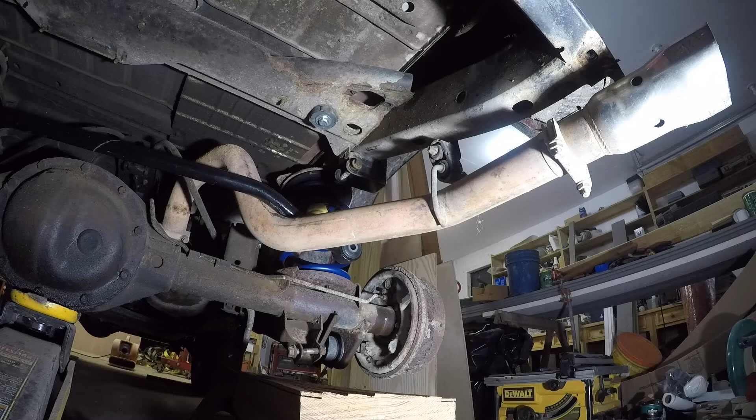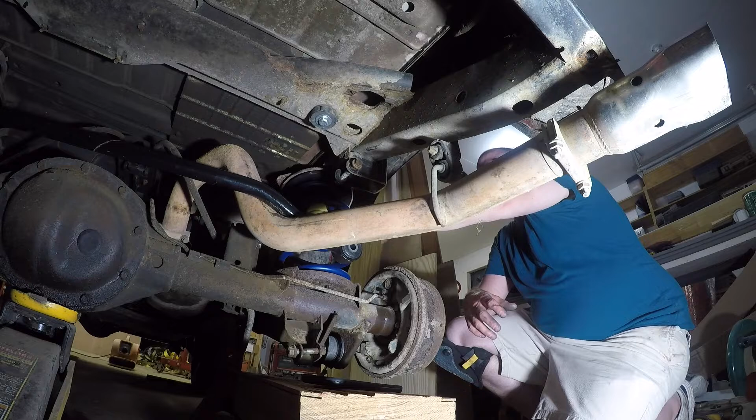I've been quite lucky. I've pretty much been using all of the original bolts, except for the two in the bump stop. Those were horrible, in real bad shape.

I'm going to just reuse this bolt. That's probably not a safe place. The bolt's had a little bit of rust, but it's really nothing. Although I believe I bought a new one. I am going to go ahead and replace this nut.

So I'm gonna lather this baby up with a whole lot of anti-seize. How much I love this stuff. That's a joke. Hammer most likely. Son of a bee, son of a bee.

I'm gonna put this on. I guess because I'm kind of nervous about my jack. Yeah, I know I got blocks everywhere.

That's not right. Come on, son of a gun. Alright, I can't put it in there too much. Let's see if I can pry it back down. That's too much.

I feel like it's slightly off. I don't know. I'm gonna... Jesus, I think the axle needs to come this way.

Just gotta torque everything here. So yeah, I'm excited, I can't wait to try this thing out. I just hope it rides better. Everything I've read on all the forums about these springs, people speak so highly of them. So I hope they do okay.

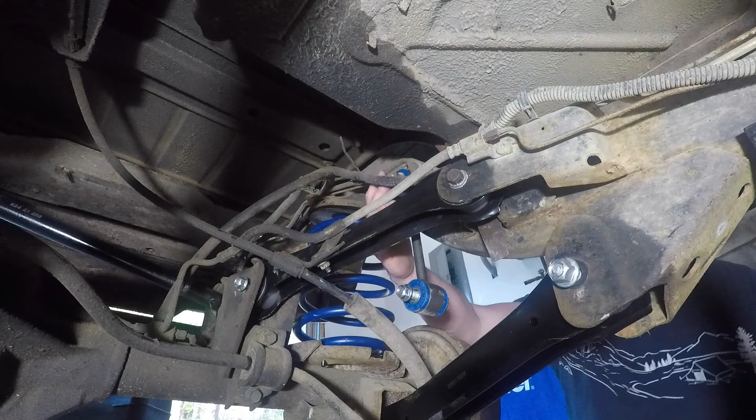Okay, this is, I think, called a sway bar link that I'm installing. You all can probably see it a lot better than I can. I was debating whether to reuse this little deal or putting the nut on. Yeah, this is kind of a pain in the butt.

Can't see anything, where is it? God, that sucker's so in there. I think I'm just going to reuse this sucker. I mean, you really shouldn't, we should use a new nut. But you know what, screw it, I'm going to reuse it. It's so hard to get the damn thing in there.

Yeah, I was debating whether I'd use the nut or not, but you know what, screw it, I'm just going to reuse this stupid thing. It makes it way easier. And I'll just reuse the nut here.

I'm going to put anti-seize on everything. If you have a car lift, this would be a lot easier, but I'm trying to save money. I'm not going to go dish out a whole bunch of money to someone to do this when I can do it at home. Save a few bucks, or I should say a lot of bucks.

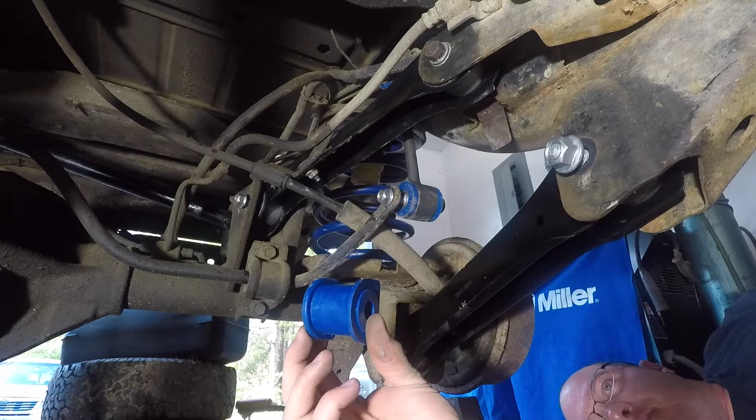And I'm also going to go ahead, if you can see it, these little bushings inside here on the axle, that's what these are. I was waiting for Rock Auto to send them, because they didn't ship for some reason, they missed it. So I'm going to replace those on the axle, and pretty much everything will be all good and new. So I'll come back here in a second.

I believe this is a 15 millimeter. I hope this thing's not under too much tension. I don't believe it is. Hopefully I can just kind of slide it out and replace this little sucker. I mean, it may not even need to be replaced, but I'm not second guessing any of it.

This thing rode horrible, it was really, really, really bad. Real sketchy, couldn't take it over, I don't know, about 25 miles an hour.

I won't bore you. What I'm doing on this side will be the same on the other side, so anything I do on one side will be exactly the same on the other. So just for video purposes, to make it a little bit more simple and straightforward.

Let's see here. Oh yeah, it's gonna be hard to get off. Come on, wiggle, wiggle. There we go, that's not too bad. That should pop off. Sweet.

Let's see which side should I put it. That was in the back. Maybe I'll go like that. See the sliced end, sliced end is on the back side. On the one from Moog, the sliced end is in the front. I guess it doesn't matter.

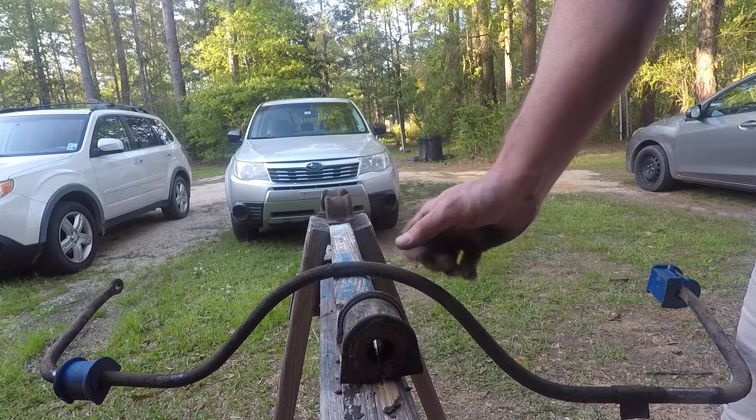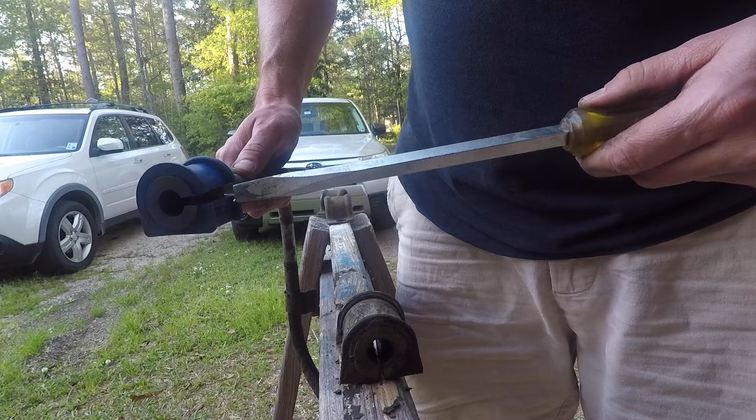Alright, so what I did is I just took the whole bar out. I couldn't really get them on it, you know. So what I did was turn it around here. I took the screwdriver - I'm not going to waste y'all's time 20 minutes fighting with this thing - and I stuck it in here and twisted it this way to open it up. And that's how I was able to shove it on there and get it started.

So I just kind of work it with my hand here. Oh shoot, come on Chris, don't screw this up.

Now y'all might want to check this out. This thing looks kind of worn. I mean, I'm going to throw it on there, I don't really care, but y'all might want to check yours out. Because if you're living up north - I'm in the south, I'm not really worried about rust here too much - but yeah, I can feel it. I know that's grease, it's grit, but it is actually slightly worn. Maybe that's just the paint. Yeah, maybe the paint, but if yours is heavily rusted, I would go ahead and replace it.

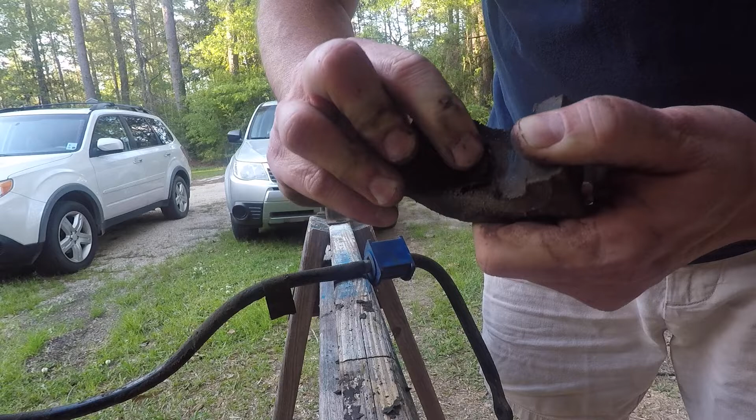And there we are, see if I can get a close-up. I don't know if you can see, the lighting's not too great. But this old one, I can peel it open pretty easily with my hands here. The light can catch it right if you can kind of see it. That is torn there, that is all screwed up. I can rip it open with my hand just about. So yeah, this thing is definitely worn out.

That off to the side. I don't remember how these went on, but I'll find out when I get under there. I know it went a certain way. Probably one's this way and the other one's the opposite. So I'll figure it out when I get under there. See you in a bit.

Alright, I slid it under here. Oops, yeah that's supposed to be somewhere there. And we'll put some anti-seize. I think it goes like that. Who knows, I could be redoing it in a bit. It looks like it, kinda sorta, the way it's shaped. Screw it. I'm used to doing things a few times, so you figure it out.

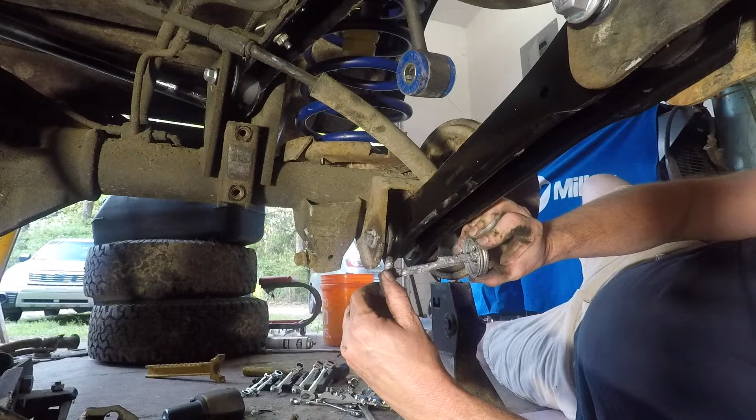So throw some anti-seize on this sucker. I have the torque specs in the manual, I'll shoot a video so you can see what they are. I think these are either 40 or 44 foot-pounds, but I hate to even say it, I don't want to be lying. I'll aim the camera at it and let you see what all the torque specs are. In some of the Jeep forums, I thought some of the numbers were kind of off that people were throwing out there. So I'll make sure I aim the camera there so you all get to see it, so you don't screw up for yourself.

I hate anti-seize with a passion. Yeah, someone out there is going to say oh no, you're not supposed to anti-seize that. I don't really care, that's what I'm doing. I want it to come off easier next time, which I hope will be a really long time before I take it off, but yeah, I still want it to be easier. And of course my socket's going to be on the other side. Hey, that'll kind of fit it. Why not, roll with it.

I'm not really torquing the - I mean, I'm going to torque them, I'm just wanting to snug them up for now. I'm not going to bore you, I'll pause it and jump to the other side and put the other one in. If there's something different I screw up, I'll turn the camera back on and admit my screw up.

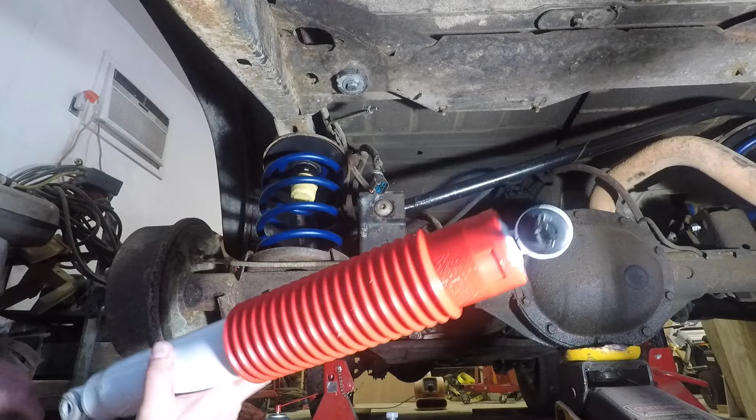Alright, so now it's about time to put the shocks on. Let me see here. Here it is, this is the Rancho RS5000. Guys on the internet said that these - some guys had told me they were really stiff. So, what can you do? Just try it out, right?

Okay, I believe what I did last time was I put these things in there and compressed them. I don't know which way I went with it, or maybe I used the jack. I don't know, yeah, we'll try it. Put my bolt through here.

I have another nut here, new nut. I'm a little bit concerned though about this piece of plastic here. I hope to God this thing - I don't know, I don't remember. My shocks didn't have all this plastic garbage.

All this plastic, I'm thinking the fuel tank might hit it, but I don't know for sure. Oh yeah, this ain't gonna work, I'm gonna have to put it in from the top. I don't remember how I did it. Maybe I used the jack to compress the bottom, that may have been what I did. I don't really remember for sure.

Anyway, some guys said that was really good, that they liked it. But these things, they're pretty good. I don't know if y'all can see this or not.

Alright, we're going to try this again. Dang it, love the cooler weather - everything I touch shocks the hell out of me. Okay, we got one here. Yeah, I just don't know if all this plastic garbage is going to clear the fuel tank. It will be interesting if it does, or it does not.

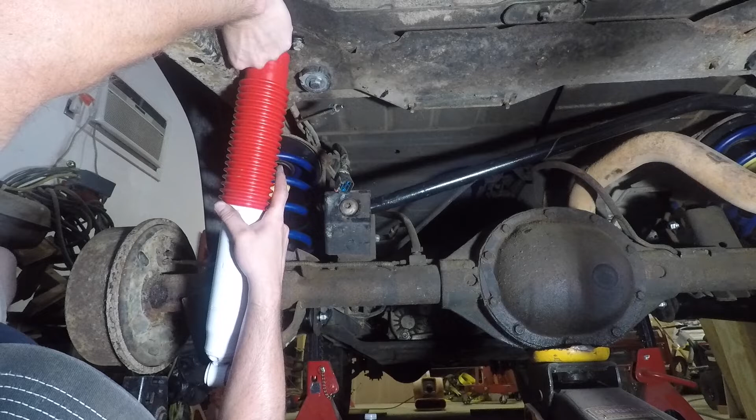Boy, that's tight. I think I can get a socket in there. Boy, it's going to be close. I may have to try and peel it up. Oh, Jesus.

I swear I feel like saying '1 hour later I found what I'm looking for.' Oh, man, that sucker's tight in there.

I think I have a short. I'm going to have to find a short. It ain't really going to fit very well.

Okie dokie, yeah, I can do it a little bit. I'm not a total weakling. Alright, come on, get back in the hole so I can catch it. Come on, get on down in there. There we go, let's see if this will fit it.

I don't know if this is it or not. Yeah, that feels like it. Sweet, alright, so one on.

I hate to lie, I think it's 23 on the top for those - those aren't much, and the bottom is a higher torque. Now, I mean it's not on the center chunk, it's just kind of there as an extra support. Now I can go around and torque everything.

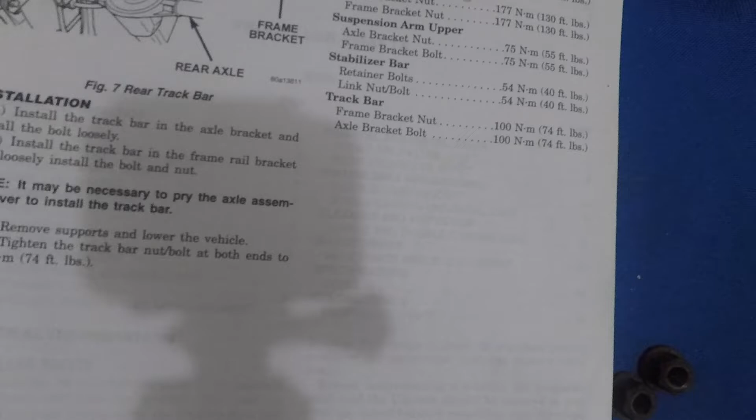No room in here, let's see here. These are all the torque specs, for such a tiny camera, and I can't even see. I'm gonna have to use my phone.

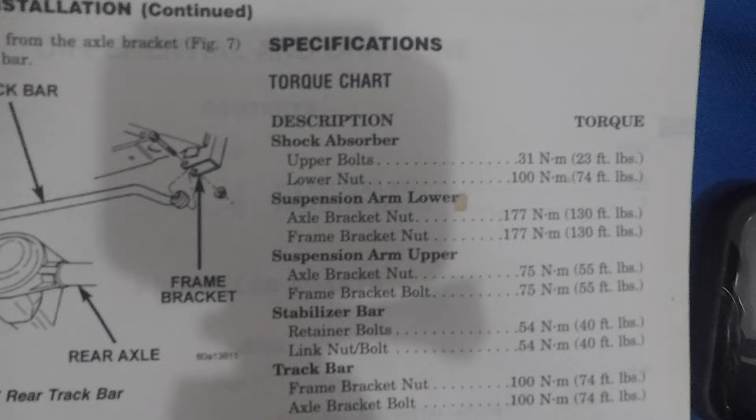See, these are all the torque specs, just for the rear. When I get to the front, I'll do it as a separate video so you all can see.

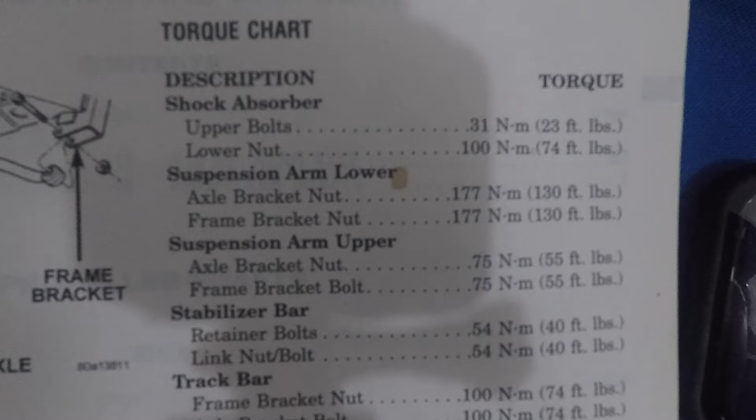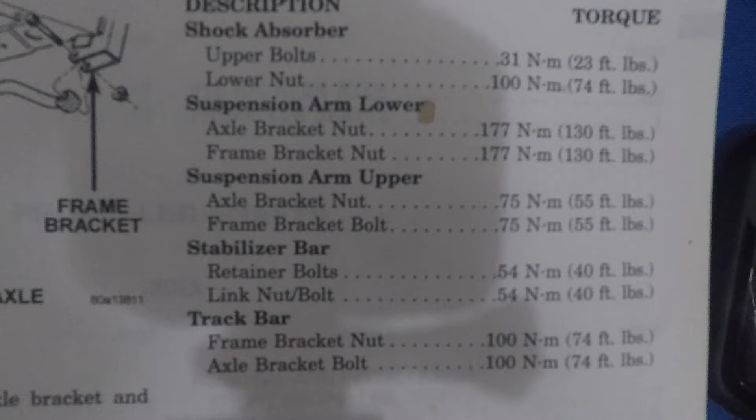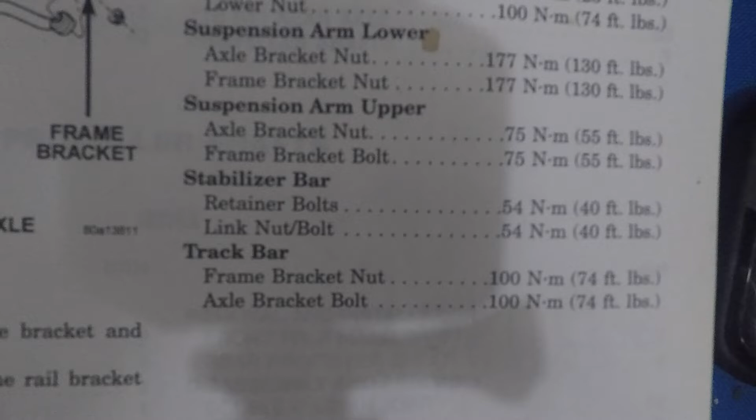Shock absorber upper bolt, 23 foot-pounds. The lower nut is 74. Lower control arms to axles, 130. To frame is 130. I think on the front ones it was a little different - one side was 130, and the lower control arm to the front axle was like 85. But they're pretty consistent, just the lower control arms in the front were a speck different.

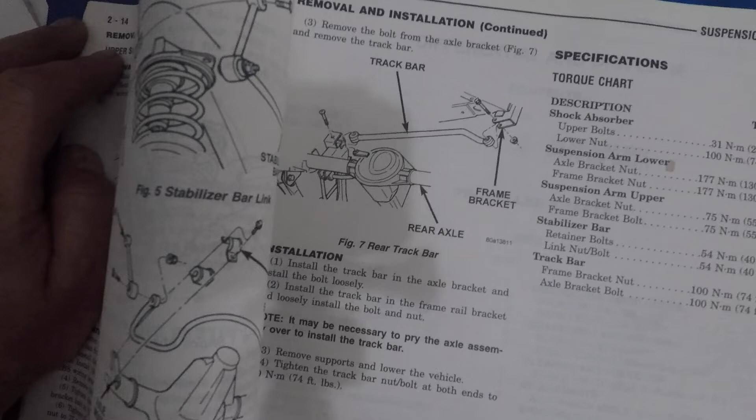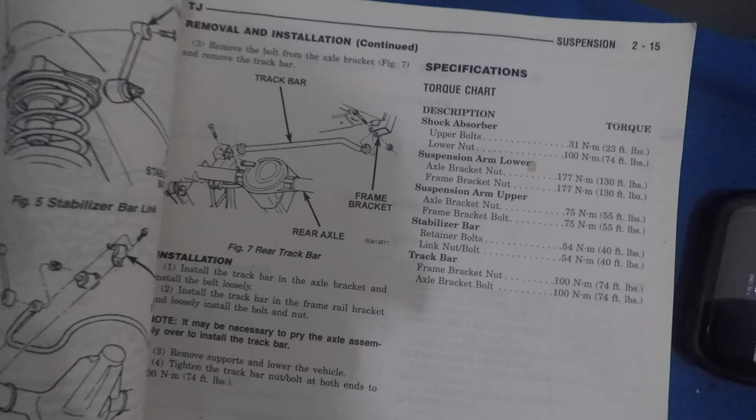So all these torque specs are from this manual. It was $100 way back around 98, 99 that I bought it from the dealership. It's pretty good, but there's still some things that could be better, as for any manual. But I'd much rather have this than a Chilton's or even the Haynes.

All right, so what I'm doing is, the torque spec in the book calls for these two bolts being 40 foot-pounds. These little sway bar links are 40. The one directly above it is 40 as well. I'm just going to show one side.

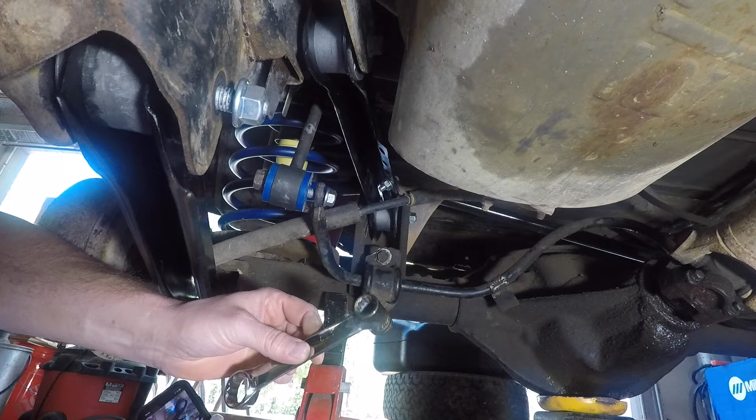I actually had to go to a friend of mine's. Let's see if y'all can see this - I spent about $21 on this. Bought a 21 millimeter boxed in wrench, chopped it off, and grabbed any old half-inch drive socket and TIG welded it to it. I know y'all probably think I got welding machines right there, but I got so much junk everywhere, it's easier just to go down the road to his house. So I ended up making this, for this nut here on the outside. It's really, really hard to get in here. I can't get in here due to this, I think it's for the parking brake. So I couldn't get it in there, that's why I made this little bracket.

Gosh, actually I think it already clicked. Yeah, I definitely know it's 40. Alright, that's 40 on that one. Here's... these are all still 40. Every one of them are 40. Oh shoot, like I said I really need to go hunt for a dang shallow socket so this thing doesn't roll off here. Yeah, maybe we can make it work. Let's see, making this way too hard.

Control arms to 55 foot-pounds to the axle, and then the control arm to the frame is also at 55 foot-pounds. Lower control arm to the frame is 130, and lower control arm to the axle is 130.

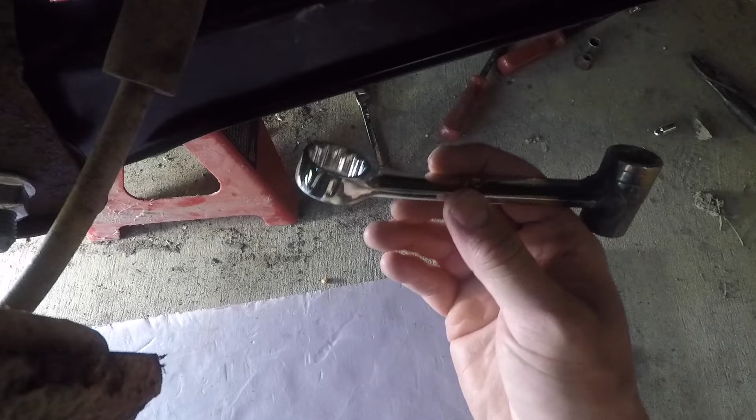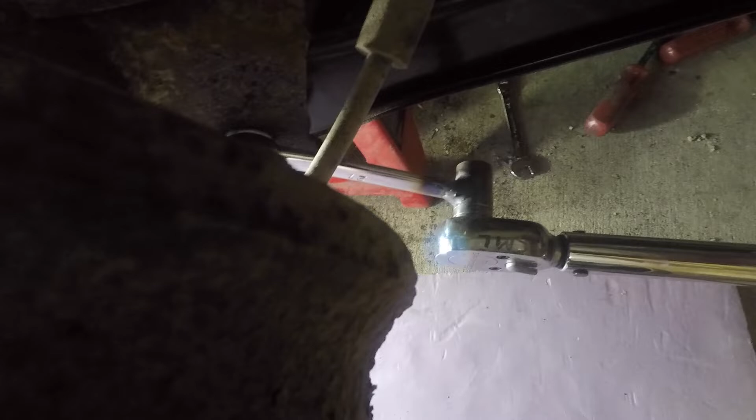Now you can see that there's just no room in here, and I know I'm blinding y'all. So you can see there's no room. This is what I talked about earlier, little fancy little wrench, that's where that goes. If I grab this torque wrench, here y'all go, now you can see. I wish you could see better. Now you can see where that goes, then you have your torque wrench out here. So it'll work, that's good.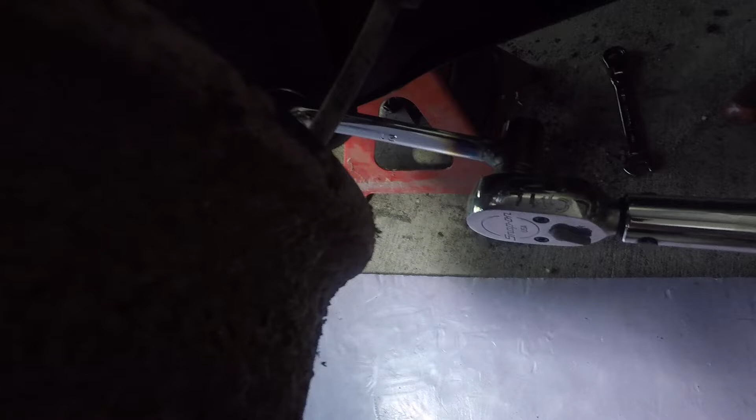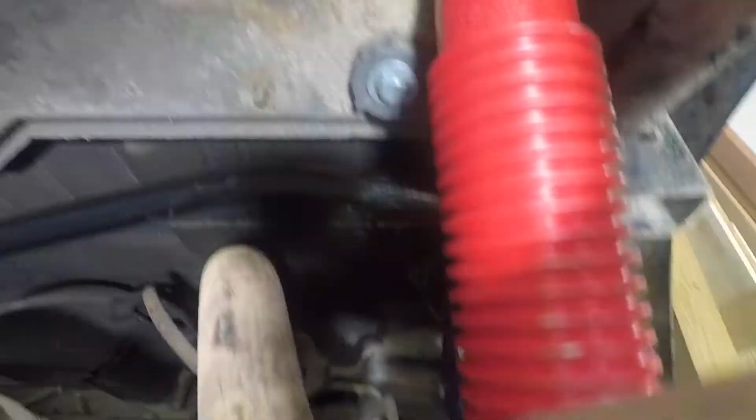After that, I went ahead and went to the shocks. Upper shocks there are 23 foot-pounds of torque. God, that thing just shocked me. 23 foot-pounds of torque, and the lower ones were 74.

These I didn't torque, these little cups. These are new, I should have reused the old ones, which I can. I think I might sandblast them, probably have them powder coated, and I'll probably throw them up on eBay to sell. But mine were perfectly fine.

The nut that goes inside here, you have to remove this, the nut that screws into there. I just put it hand tight, didn't really bear down on it. I didn't want to cause problems in the future, but when I removed these, they came out pretty easily. I've heard horror stories of guys having to drill this bolt out. So anyway, that's what I did. I put a ton of anti-seize like I always do. People don't really agree on that because it could back off, yada yada. I don't care, I don't think it's going to back off. That's just my opinion.